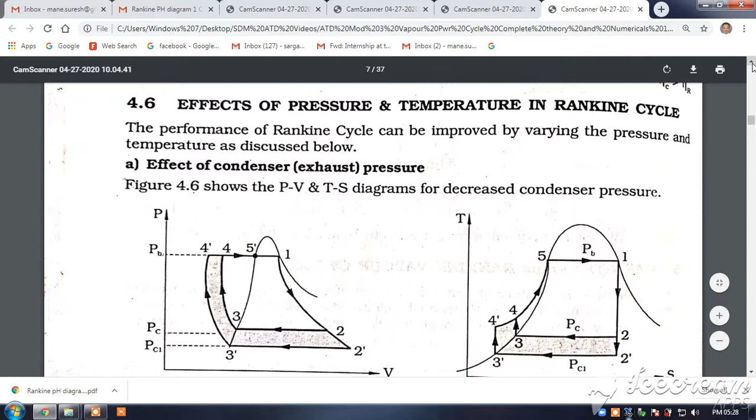Now we'll study the effect of pressure and temperature on Rankine cycle. The performance of Rankine cycle can be improved by varying the pressure and temperature as discussed below. One is effect of condenser pressure. Okay, so you can see this PV and TS diagram.

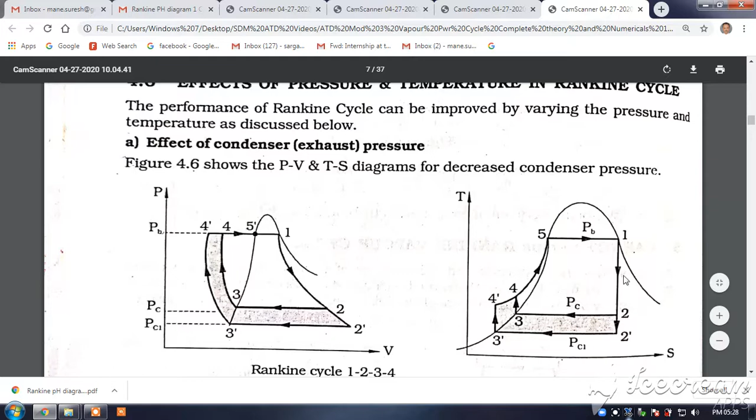Here 1, 2, 3, 4. This is the original Rankine cycle. 1, 2, 3, 4, 5. Okay, but if I reduce the pressure, this is the condenser pressure PC. If I reduce the condenser pressure to 2 dash 3 dash here, then the revised cycle will be 1 2 dash 3 4 dash 5 dash. And similarly here 1 2 dash 3 dash 4 dash and 5.

This is what will happen: Rankine cycle 1 2 3 4; with decreased condenser pressure, Rankine cycle 1 2 dash 3 dash 4 dash. From the TS diagram, it is clear that with the decrease in the condenser pressure from PC to PC1, the area of the cycle diagram increases by a certain value. This is the shaded area. And this area represents the increase in work done by the turbine. In the PV diagram, it increases the work done by the turbine. Hence, thermal efficiency increases.

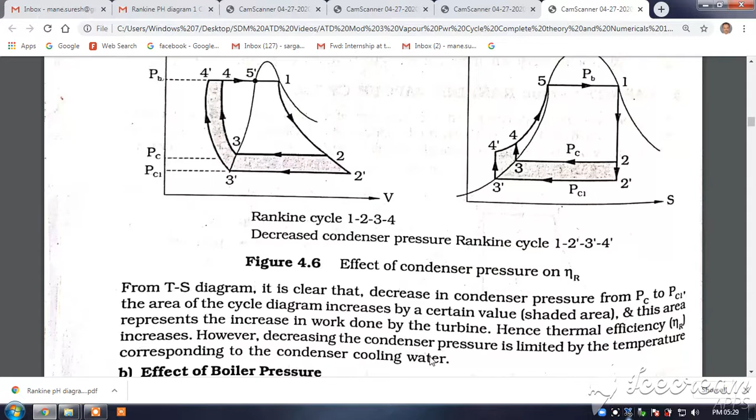But decreasing the condenser pressure is limited by the temperature of the condenser cooling water. See here, whatever vapor we are cooling, it depends on the water which is cooling the condenser itself. That is why the condenser works at very low pressures, but the limitation is the condenser cooling water temperature. Similarly, effects of boiler pressure.

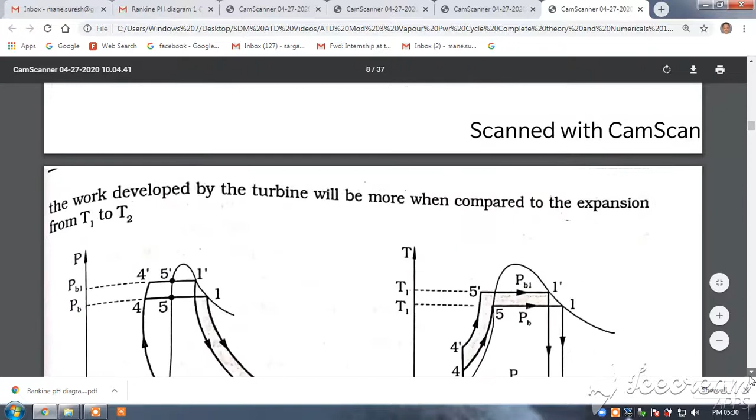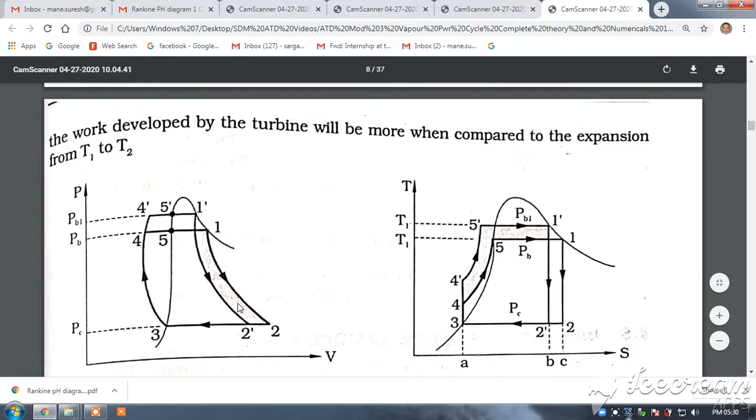Now you can see the effect of boiler pressure here. Now instead of original T1 pressure, I increase it to T1 dash. So the boiler pressure was this one, 1 2 3 4 for the original cycle. 1 dash 2 dash 3 dash 4 dash is the cycle with the increased pressure. So what happens here also, you can see the heat rejected. Rankine cycle is 1 2 3 4 5. Increased boiler pressure is 1 dash 2 dash 3 4 dash 5 dash.

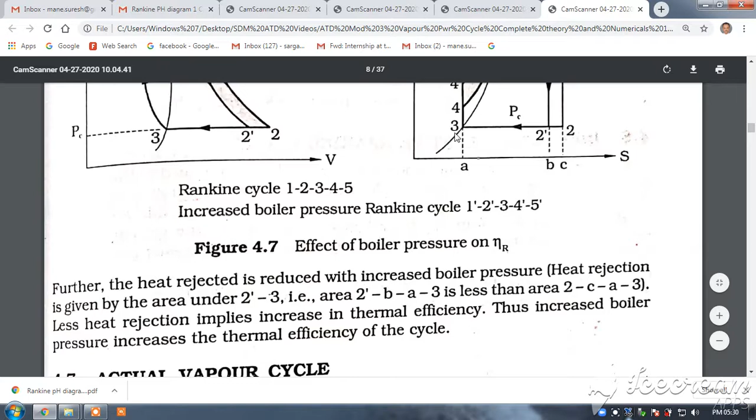Now the heat rejected in the TS diagram, you see here, 2CA3 is the original heat rejection, but because of high pressure the heat rejection is 2 dash B A3. So this is reduced. Because of reduced heat rejection, the efficiency of the cycle increases. With the increased boiler pressure, heat rejection given by the area 2 dash B A3 is less than 2C A3. Hence, less heat rejection implies increase in the thermal efficiency. Thus, increased boiler pressure increases the thermal efficiency of the cycle.

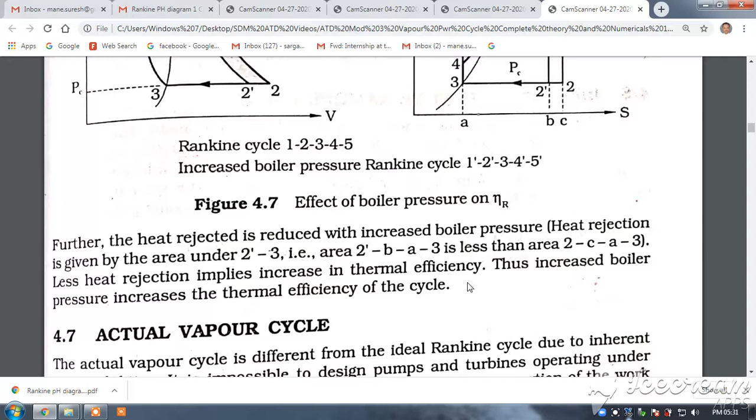In real life, you find boilers working at very high pressures and condensers working at very low pressures, even lower than the atmospheric pressure. This is a real life condition. So, increase in the boiler pressure as well as a reduction in the condenser pressure will increase the thermal efficiency of the Rankine cycle. So you need to practice these diagram sketches very properly so that you are able to tell this. Here the only criteria was this heat rejection.

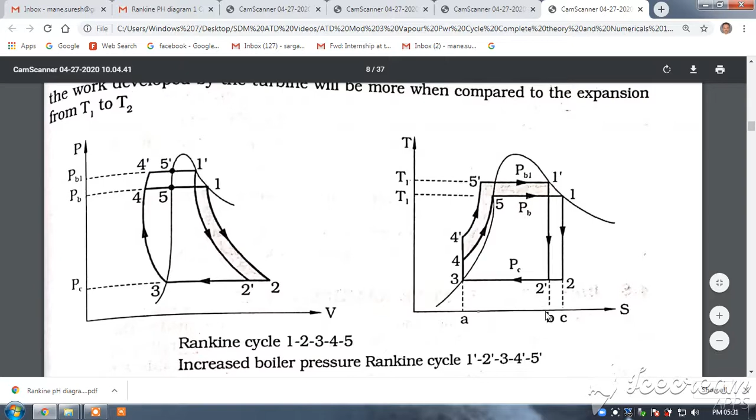So you can see 2CA3 is greater than 2 dash BA3. This is the heat rejection. This is the heat supplied. The heat rejection is less, that is why efficiency is more. And here the thermal efficiency increases because the work done is more. This shaded area is the work done. This work done is more, that is why the thermal efficiency increases.

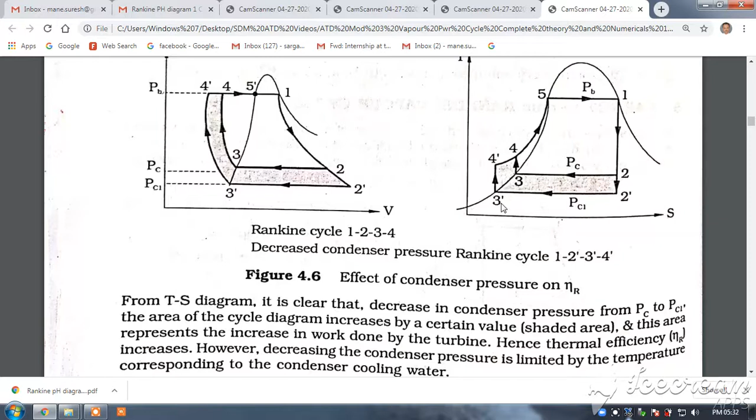But now this temperature you see here, condenser temperature, is a limiting factor. Whatever water is available at that temperature, you cannot go beyond that. So that is a defining temperature: to what extent you can reduce the temperature of the cooling water, and hence to what extent you can reduce the condenser pressure.